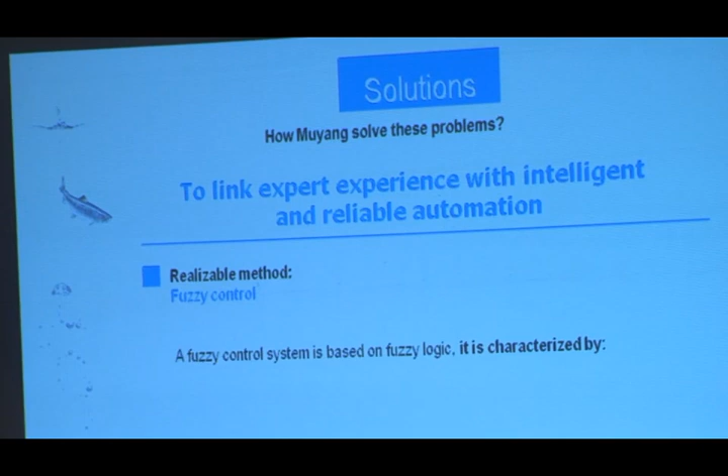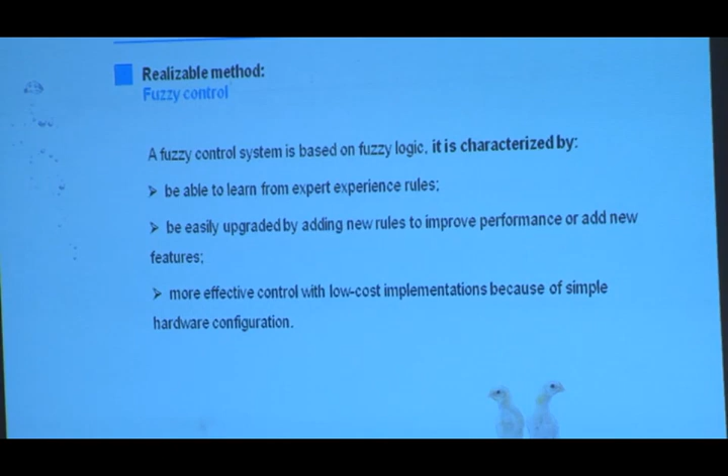So how Muyang solved this problem is by linking experience with intelligent and reliable automation. This method we're presenting today is fuzzy control. A fuzzy control system is based on fuzzy logic. It's characterized by its ability to learn from experience rules and be easily upgraded, adding new rules to improve performance or add new features. It's more effective to control, with low cost implementation because of the simple hardware configuration.

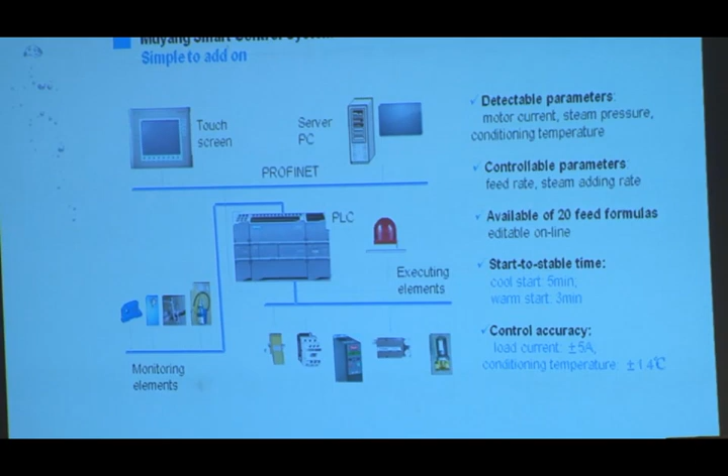The Muyang Smart Control System is simple, adding on a touch screen, power PLC, server PC, monitoring elements, and executing elements. Detectable parameters include motor current, steam pressure, conditioning temperature, and controllable parameters include feed rate and steam addition rate. It has a minimum of 20 feed formulas available, editable online, with a cold start-to-stable time of 5 minutes and warm start of 3 minutes, with control accuracy of load current at plus/minus 5 amperes and conditioning temperature at plus/minus 1.4 degrees.

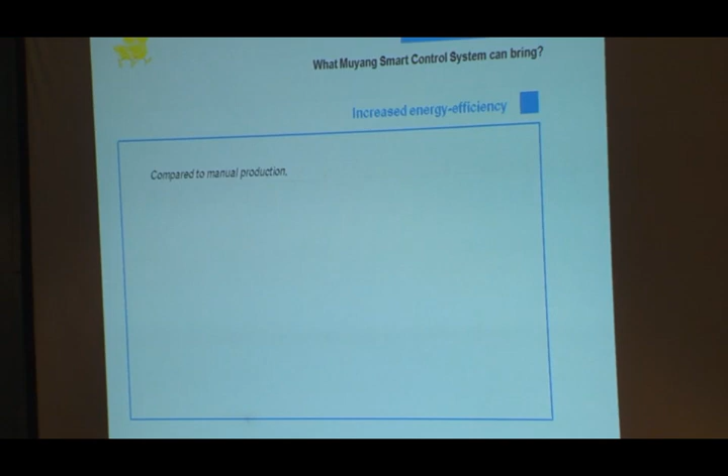What the Muyang Smart Control System brings is increased energy efficiency. After 2 years of running, we got actual real data showing that compared to manual production, output increased by 80%.

Thanks to the process parameter optimization function based on expert experience, the pelleting is able to run at a high operation level, and average power consumption decreased by 9%.

Because of stable and consistent production and eliminated downtime, there's more adaptable production change across different seasons. 20 formulas are available for production, and each formula provides customized expert operation solutions, with remote control, open interface, data processing, data collection, recording, reporting, printing, production tracing, and optimizing.

It's also able to communicate with an ERP system, if your company has one. Yeah.

Yeah, thank you. Just to give you some simple idea for this one. Yeah, thank you.

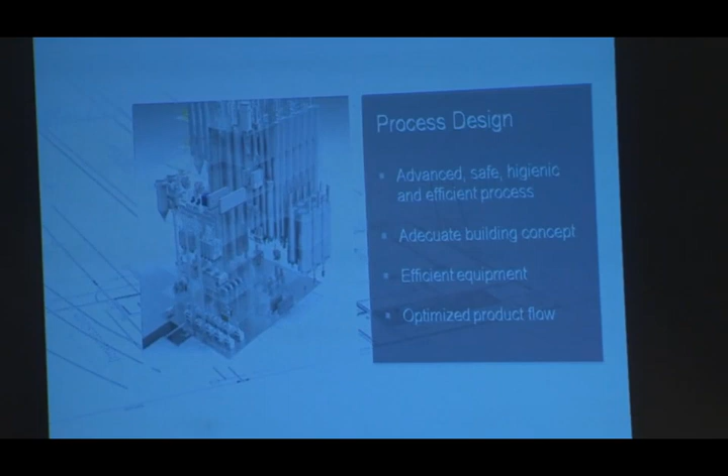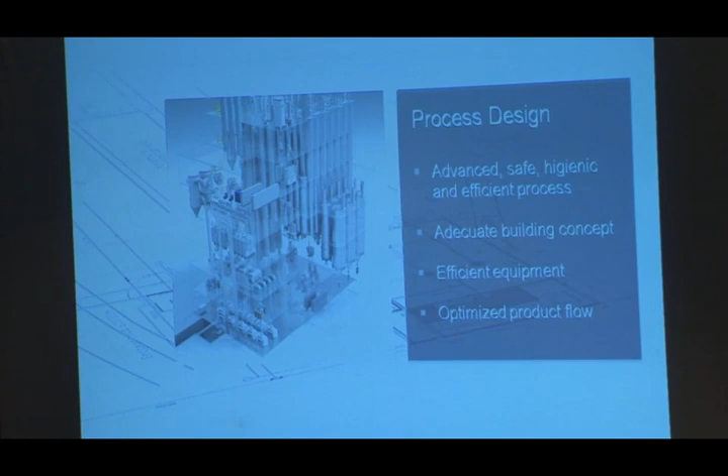Adequate building concepts, as you already heard this morning from my colleague Nick Wilkins talking about rice milling - that's also important in grain milling. Efficient equipment, as mentioned, optimize product flow to ensure the lowest possible energy consumption.

As a solution provider, we must respond to these trends, and we do this on the drivers we can directly influence. So let's make a bridge to our equipment now - these were the trends or the drivers.

Efficient cleaning - everything in a mill starts with efficient cleaning. Only the best possible prepared raw materials can be processed further, allowing the best possible end product quality.

Careful handling of the raw products, separating performance - just a few keywords. Reliable operation, low operation and maintenance costs. All this is of course linked with these trends or drivers we've heard before.

I'm going to show you now a few examples of equipment which have been designed exactly according to these needs or trends, to make sure your business runs successfully. For instance, our high capacity grain cleaner or grain classifier.

At the beginning of the value chain of the process, in silo transfer and cleaning, a classification machine - for that we use the grain classifier Vega, which guarantees accurate grading and cleaning, high throughput on minimum footprint, easy operation and maintenance, and low energy consumption.

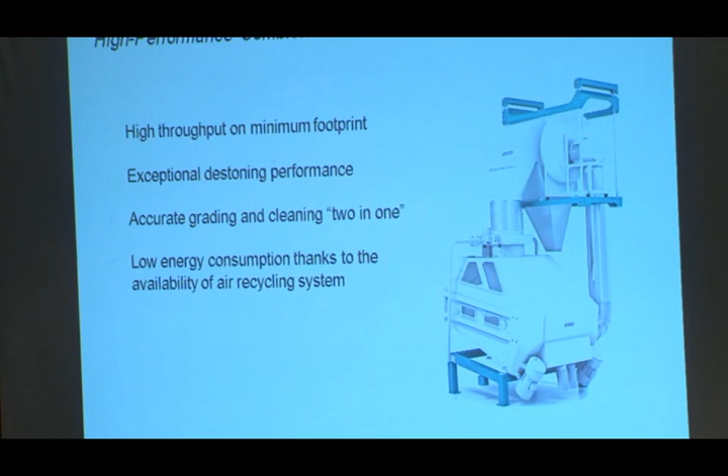So we are proud to announce and introduce our latest innovation, which you can see here - the MTCG combi stoner. A good example where our R&D department really looked after all these drivers and trends to make sure we covered all of them.

Optical sorting - this morning Nick Wilkins explained, for those who were here, how important optical sorting is nowadays in rice milling, in rice processing. It's the same situation in grain milling.

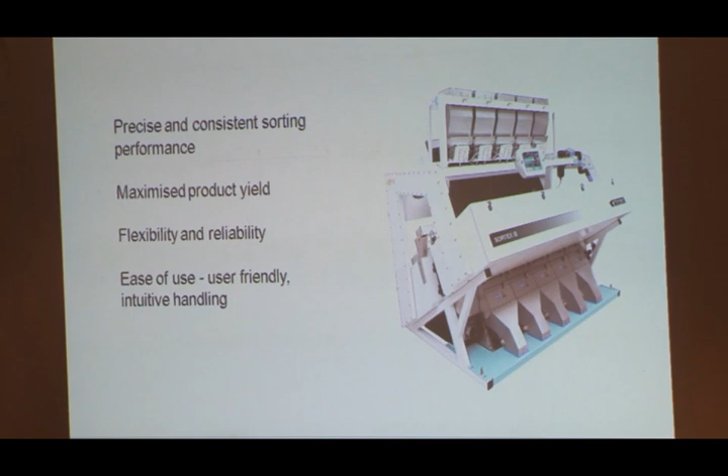You probably won't find a new mill today operated without any optical sorting machine. That means optical sorting has become a standard in grain milling, because of several factors: precise and consistent sorting performance, maximized product yield, flexibility and reliability, ease of use, user-friendly and intuitive handling - just a few keywords.

Whenever you ask for the highest possible product safety, optical sorters from Sortex are an absolute must-have piece of technology.

When it comes down to accurate water measuring and dosing, we recommend our PHD moisture control. Correct and constant moisture is one of the important factors that influence the whole milling performance.

Since wheat has natural moisture variations which impact the mill flow, it often requires continuous readjustment of the mill settings. And that should be done automatically, accurately, and constantly - meaning online and in real time.

Therefore, we have our PHD, which you can also see on our booth down there.

Let's go to efficient milling, or let's talk about efficient milling. What does it mean? What's behind it?

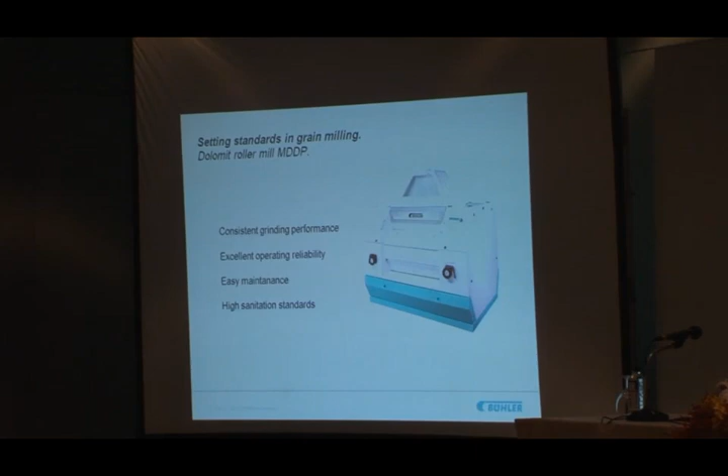In the heart of the mill, the answer is our Dolomit roller mill. It is a strong and market-proven machine with features resulting in consistent grinding performance, excellent operating reliability, easy maintenance, and high sanitation standards.

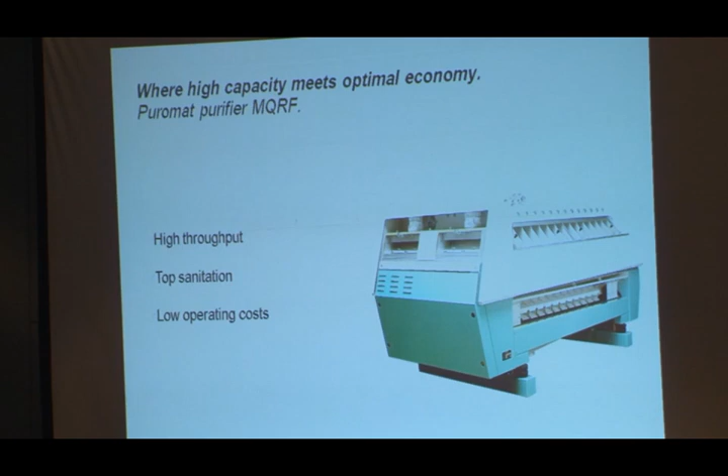For instance, our purifier - high throughput, top sanitation, low operation costs. You see, it comes again and again, no matter which machine we go to. It has a clear rule and we are following clear standards.

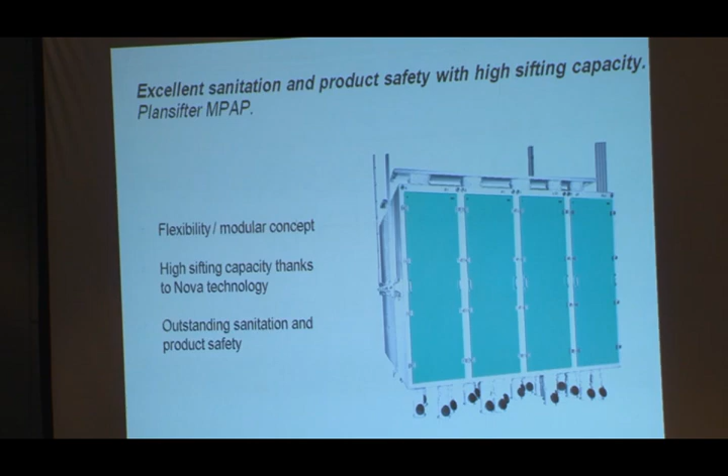Same situation with plansifters - flexibility, modular concepts, high sifting capacities, outstanding sanitation and product safety. It all comes back to these drivers again and again.

Premium end products. Let's go to the finished product section. This section is not less important than cleaning and milling. At the end of the day, top quality flour is the basis for top quality food, and your customers, bakers, ask for consistent quality at a fair price.

To guarantee such products and parameters, constant quality is needed in the finished product section: efficient on-target specifications and online checking like NIR systems, which allow constant online monitoring of your product quality.

Last but not least, the knowledge behind all of that is the most important point. Just building nice, good-looking machines is one side of the medal; the other part is the knowledge and technology behind it.

In the milling section, beside other factors, increased roll lengths and sifting area have a strong impact on milling performance, such as higher and more stable flour yields, more stable quality of finished products, more reliable operation, and less supervision needed in production than before.

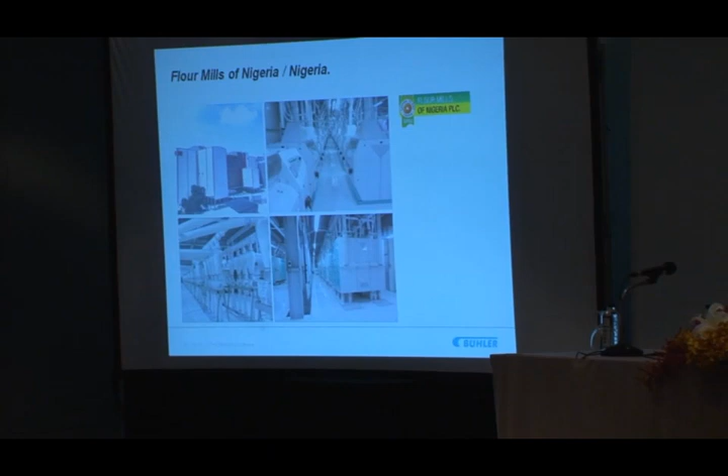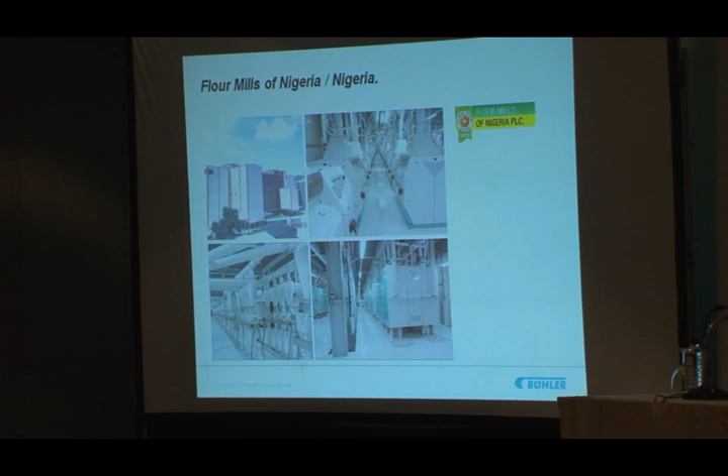Another nice example is Flour Mills of Nigeria. Here we just installed a new state-of-the-art flour mill complex added to an already existing 6,200 tons grinding capacity a day. That project consists of a 1,000 ton flour mill, a 750 ton system, and an additional 480 ton system.

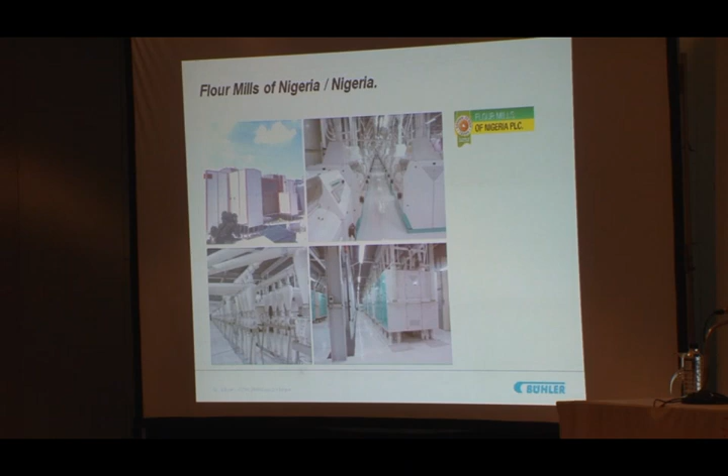In the meantime, since we commissioned that plant, this customer already installed another 550 ton mill and an 80 ton special mill. As you can see, success means working together, focusing on the most important parameters to make sure you're going to get there.

As a conclusion or take-home message, I'd like to give you some bullet points: optimal use of raw materials, low operation costs, high yield of premium finished products, and easy to operate and maintain are probably the main factors. Thank you very much for your attention. If there are any questions, I'm more than pleased to answer them.

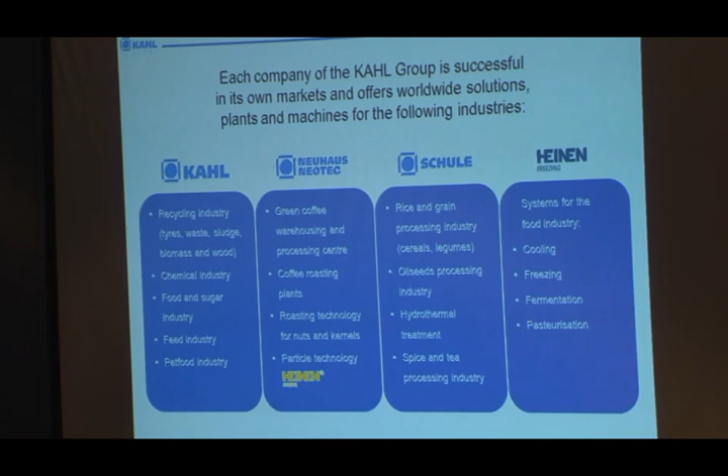This is an aerial view of our headquarters in northern Germany, in the city of Reinbek, close to Hamburg. In this area, the companies of Kahl and Schule are located, so the fabrication and also the engineering offices are located there. And then we have 2 more facilities near the city of Bremen, where companies Neuhaus Neotec and Heinen Freezing are located. In total, the Kahl Group today has about 700 employees.

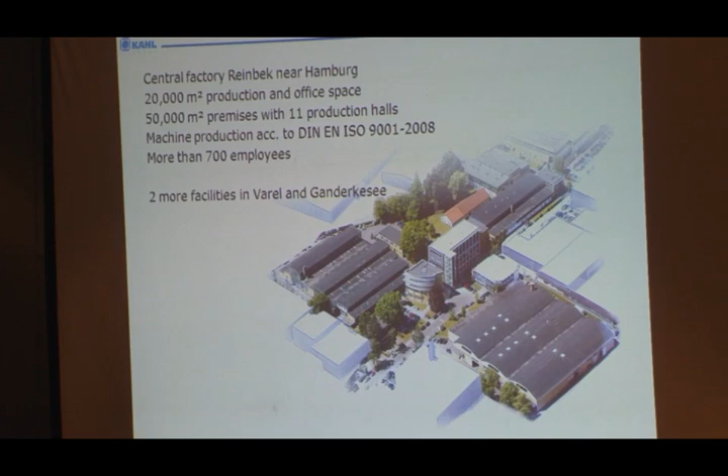As I said before, all 4 companies of the Kahl Group are medium-sized German businesses, so it's 100% made in Germany. The Kahl Group is really an exporting company. 85% of our products go to export. We have a number of offices also, for example, in Europe, in the Netherlands, in France, in Spain. We have an office in the United States. Recently we opened an office in Jordan, for example, for our Middle East activities. And then in other countries like Thailand, we work together with local agencies, quite often German trading companies who have specialized in exporting German-made products and technologies to countries like Thailand.

So after the general overview, I want to start with the first technology that I want to present to you today, which is oat processing. This is a technology that is provided by our sister company Schule. Schule can supply complete plants for oat flaking. Oat flakes are quite commonly used in breakfast cereals, mueslis, and muesli bars. Schule can supply the whole process from the oat grain to the finished oat flake.

In general, the process consists of a number of steps. As in most process steps, cleaning and classifying are the first steps. Then you need to shell the oat. The oats need to be sorted, they need to be cut. Then the actual flaking follows, and finally the drying process. I will look into these independent or separate process steps in a bit more detail in the next couple of slides. So for the cleaning, classifying, shelling and sorting equipment, there are a number of machines available from Schule. They have basically all the equipment to provide these process steps.

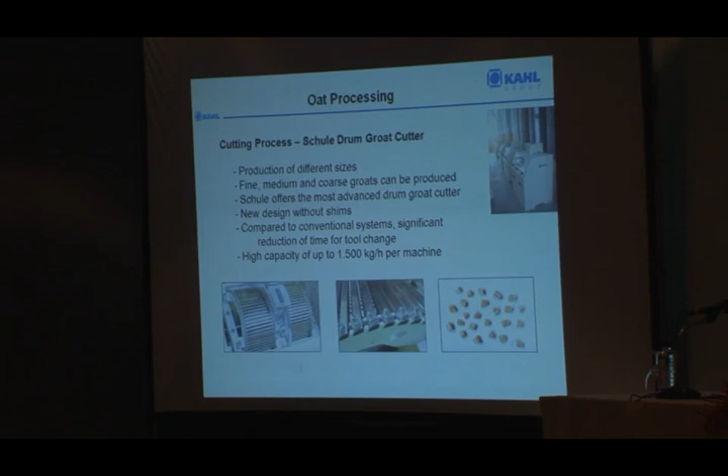One of the main process steps in the oat flaking process is the cutting of the grain, and this is done with so-called drum groat cutters. These machines are one of the specialty machines supplied by Schule, and with this machine you can produce groats of different sizes depending on your requirements. You can basically produce 3 different sizes: fine, medium or coarse groats.

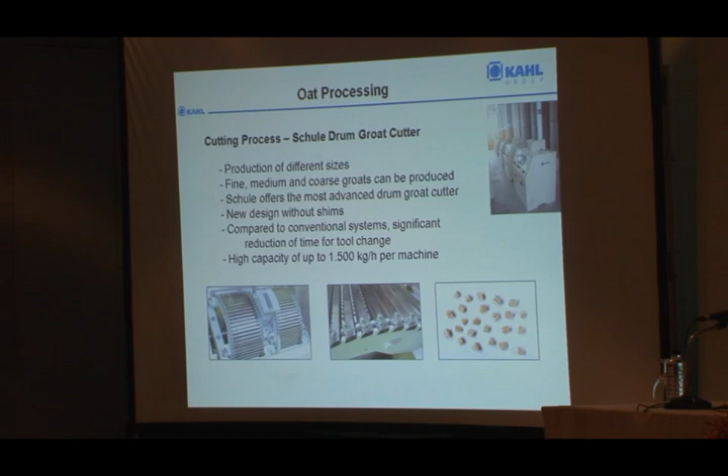Schule has put a lot of effort and money into upgrading this technology in recent years, so today Schule provides one of the most sophisticated drum cutters. One of the big advantages of the Schule system is that the tool change is much faster than with conventional systems. Here on the picture on the left is the knife assembly that cuts the groats into pieces, and these knives, as you can see in the middle picture, are attached to a basket.

With a conventional system, if you need to change the knives after they've become dull, each knife has to be taken off individually. With the Schule system, you can take out the whole basket, have a separate spare basket on site, put that in, and be back in operation in no time, then change the knives in the meantime, so there's no loss of production.

You can produce different sizes of groats, and this is achieved by the angle at which the knives are set. In previous designs, under each knife there was a small shim which could influence the angle of the knives. With the new system, you don't have any shims anymore, so the changeover time for changing the tools is reduced quite significantly.

The drum groat cutters come at a capacity of up to 1.5 tons per machine, and in case bigger capacities are required, 2 or more machines are used.

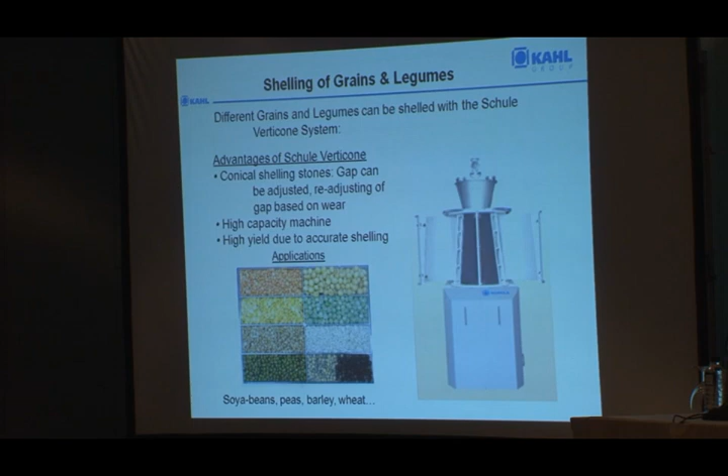The advantage of the Schule system is that we have conical stones, so when the stones are worn out, you can readjust the gap - you can lift the stones so you can maintain the gap between the stones and the screen.

In general, you see a number of applications here. For example, it can be used for soybean, for peas, for barley and wheat. Last year we supplied one of these machines to Thailand for one of the big companies for the shelling of soybean, and this customer will now use the shelled soybean as an ingredient for his dog food production.

Another aspect to consider when shelling legumes or peas is that in recent years, the price for fish meal used in fish feed production has increased. So people are searching for ways to replace this animal protein with vegetable protein. The issue with using vegetables like peas and legumes is that you always have a lot of fiber in the husk, so your percentage of protein is reduced because of the high fiber content.

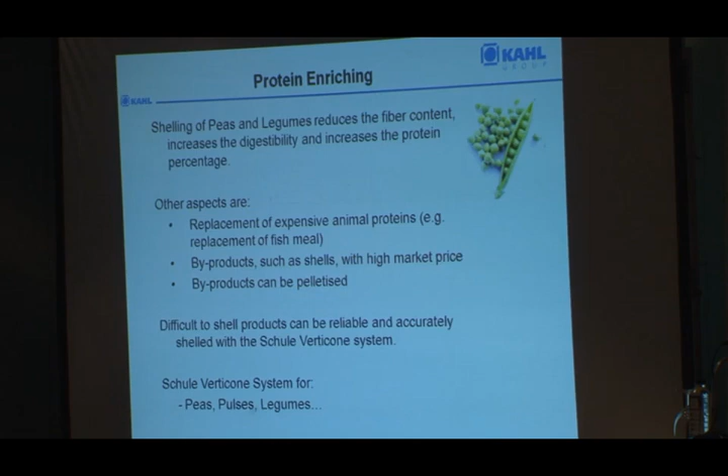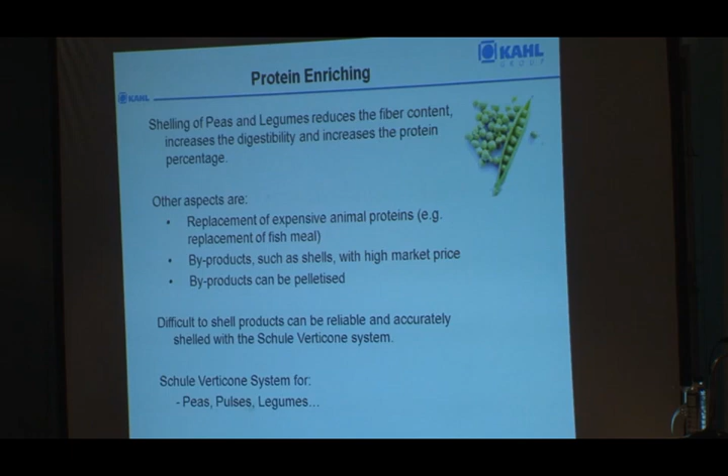Once you remove the husk properly, your protein percentage in the remaining product increases. So there's a chance of utilizing more vegetable protein in recipes for fish feed in the future with this system. As mentioned before, this system is used mainly for peas, pulses and legumes, but it can also be used for the milling of rice, which is another application.

Another technology offered by company Schule is the parboiling of rice. Schule can supply batch systems but also continuous systems for the parboiling of rice. It can be used for paddy and brown rice, and the parboiling gives you the opportunity to influence the properties of the rice.

For example, the dehusking properties are improved. You can increase the yield of the rice, and also achieve a higher nutritional value of the rice because some of the vitamins that are sitting in the husk or just below the husk move into the product.

So these are, in a nutshell, the advantages of the Schule process, and one of the main advantages is that they can offer the continuous process. It is a very flexible system - you can set the parameters as you go, and this technology is used by a number of Schule plants worldwide.

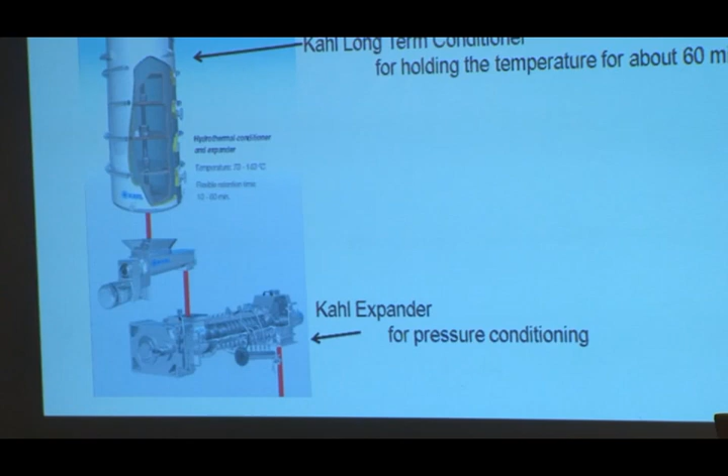It consists of a standard mixing conditioner where the rice bran is conditioned with steam. Afterwards, the rice bran is held at a temperature for 60 minutes and then passes through the Kahl expander technology. The reason for stabilizing the rice bran is that it has a lot of oil that gets rancid very quickly, so the shelf life of the rice bran is only very short.

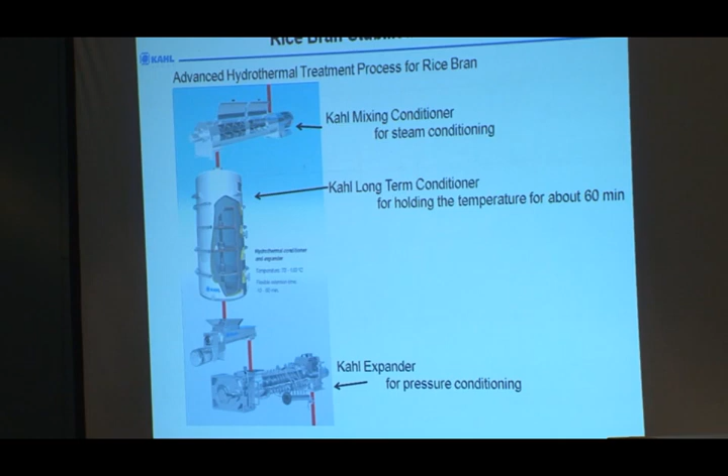If you put it through this hydrothermal treatment, the shelf life can be increased from a few days to several weeks. That gives the customer the advantage that he can buy the rice bran on the market when it's available for a cheaper price, stabilize it, store it, and use it for his extraction plant later on a continuous basis.

And that's basically it. Thank you. Thank you.

I think we had a wide-ranging presentation there with different types of equipment available for different processes in the grain sector. Anybody got a question?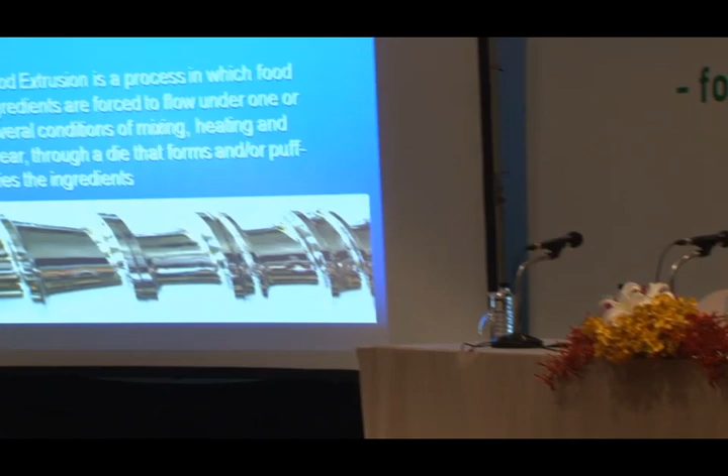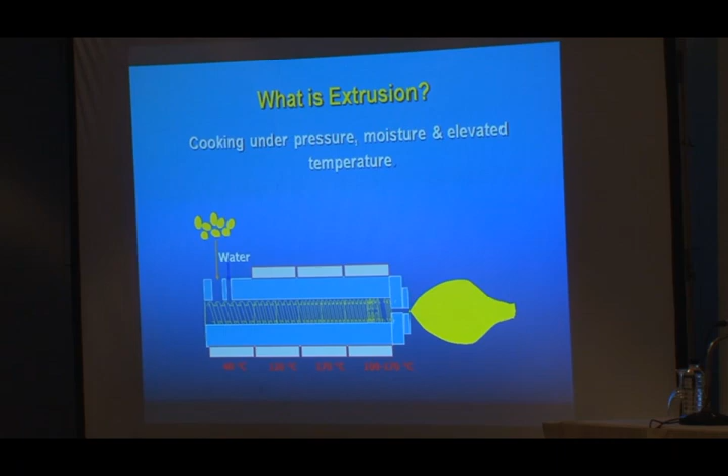It's basically a process in which food or feed ingredients are forced to flow under one or more conditions - mixing, heating, shear - to a die that forms a puff or different product like that. You can say it's a continuous pressure cooker in which we add our cereal, do the cooking, add some water, and it goes through and we cook it under pressure, moisture, and elevated temperature. I call it a continuous pressure cooker.

A typical extruder will consist of basically 4 different portions. One is a delivery system, then we have a preconditioning system, then of course the heart of the extruder, and at the end is the die. To make it easier, you can divide them into these 4 areas when explaining to students how that works.

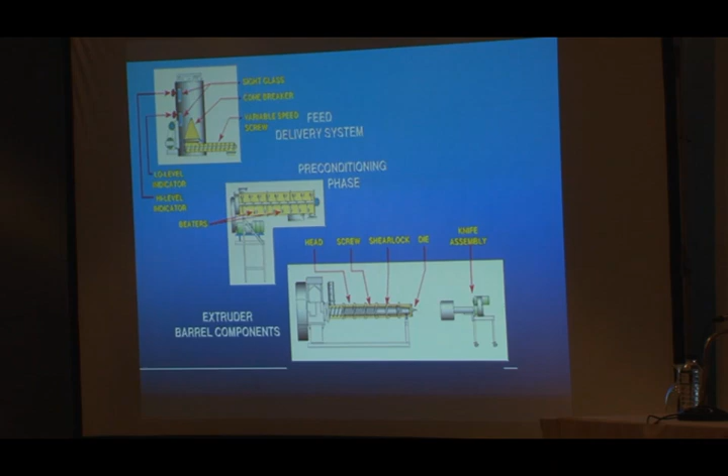Your cereals will go into the delivery system. Then we have preconditioning, in which we add some water and steam, and if we want to add molasses or fats or anything like that, we mix it together in that area. Then it comes to the barrel, where the cooking takes place, usually for 15 to 20 seconds, and then at the end there's some kind of knife or cutting device that cuts the product.

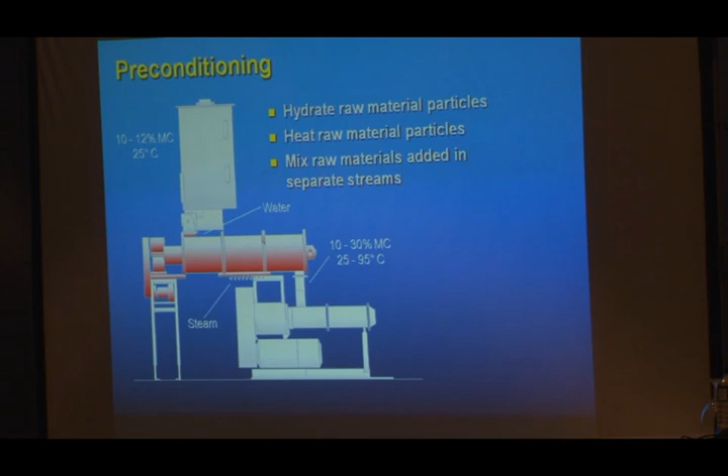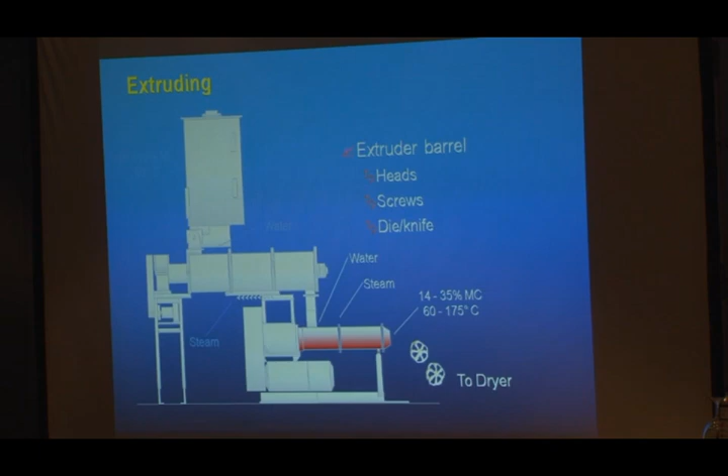To show you how it works hardware-wise: at room temperature we have our cereals, our grains, usually around 10 to 12% moisture content. From the delivery system it goes to the preconditioning, where we add steam and increase the temperature. Depending on our goal - like he just mentioned about rice bran - we can also put rice bran in at this stage, increase the temperature, and depending on what we want to make, increase the moisture content. Then it goes to the heart of the extruder, where we also have the option to add steam and water for final tuning, and then we cook it.

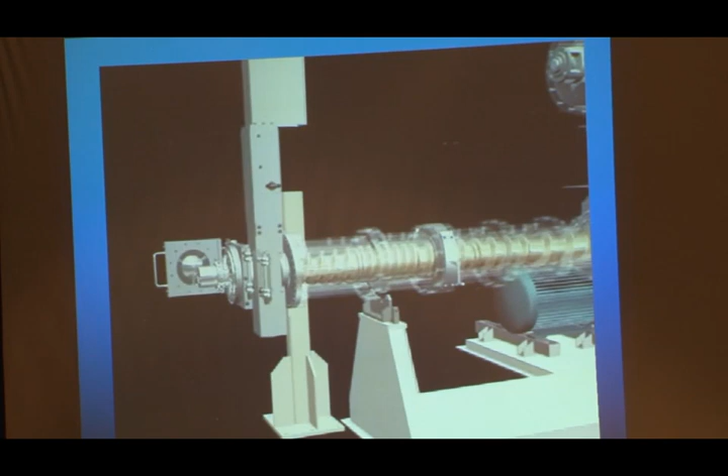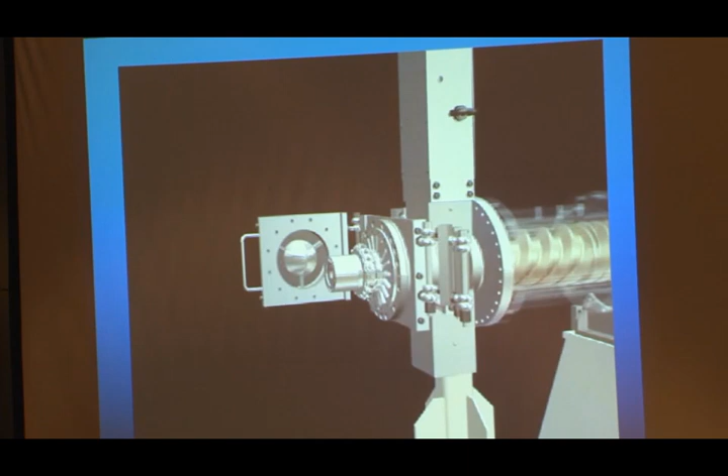To show you how that takes place, I have some animations here. Basically, as I mentioned, the raw material comes into the extruder's feeding system, where it's fed very thoroughly and accurately, and goes to the preconditioning section. There we have some kind of beaters - it could be a single shaft or a double shaft - which mix the raw material with steam, water, molasses, or anything you want to add. Then it comes to the heart of the extruder where cooking takes place, and at the end we have a die that shapes the cereal product. That's when the cooking takes place with this process, using some kind of extruder. That's a very typical process that takes place with any kind of cereal.

Just to give you some animations of what takes place inside the extruders. I wish I could go and see it, but usually it's not possible. So why are we talking about extrusion?

Because it offers a lot of advantages. Some of them we call adaptability. We can process breakfast cereals, snacks, rice bran, pet food, aquatic feeds, texturized soy protein, rice - we've got different things there, so it's very adaptable. A variety of products can be made in different shapes, textures, and colors - very hard shape, soft shape, semi-moist, all different can be done.

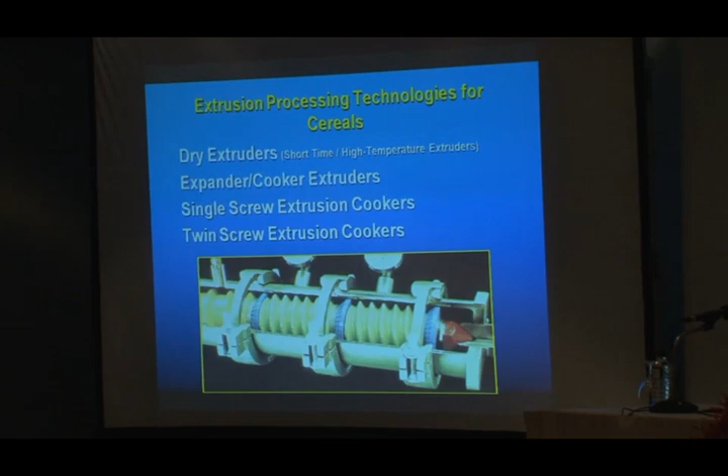There are different kinds of extruders that can be used in cereal processing. We have basically what we call dry extruders, which is very short time, high temperature. Then we have expanders and cookers and that type of extruders. We have single screw extruders and twin screw extruders.

By the way, in my pilot plant we have 8 extruders from different representatives. Showing some pictures doesn't mean I endorse anybody - we don't endorse anybody, but it's just what we have in our system.

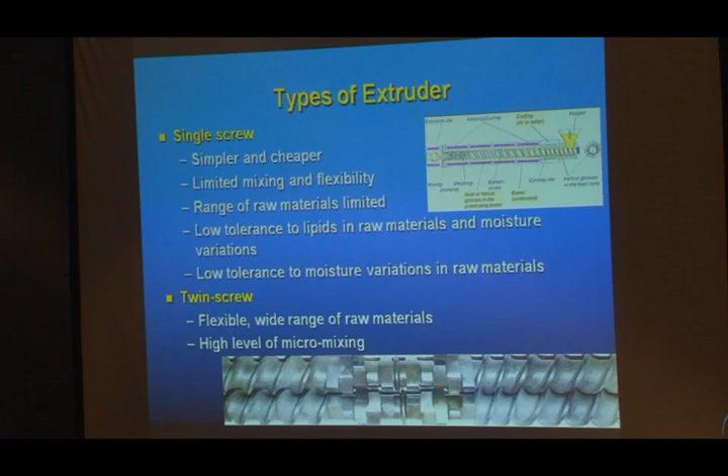Basically, single screw extruders are simple, relatively cheaper than twin screw, but they have limited mixing and flexibility. Also sometimes the range of raw materials may be limited - low tolerance to lipids, so if you have high fat products it may not go through, and also low tolerance to moisture variation. Whereas twin screw extruders are more flexible - they have a wide range of raw materials and a high level of micro mixing you can do. This is one of the very simple extruders that we also have.

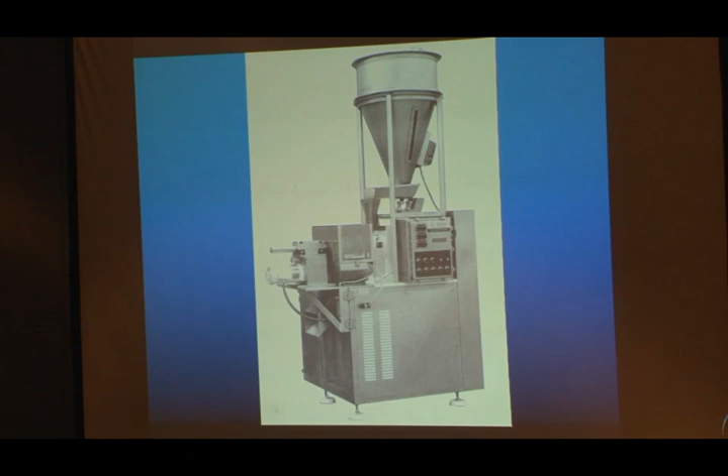This is for snack food production where you put some cereals - we use corn, sorghum, rice, you can use any of these things, and it makes the product. Basically it's a very simple process where your corn or wheat ground comes in, and in a very short time, within like 10 to 15 seconds, you cook it, and then you get your product - that's how you make Cheetos and all different kinds of products.

You can have a single or twin screw, dry extruder or wet extruder - any of these extruders can be used to make all different kinds of baby foods, cereals, crispy cereals, flatbread, soy foods, dietetic bars. We can use it depending upon what you want to make.

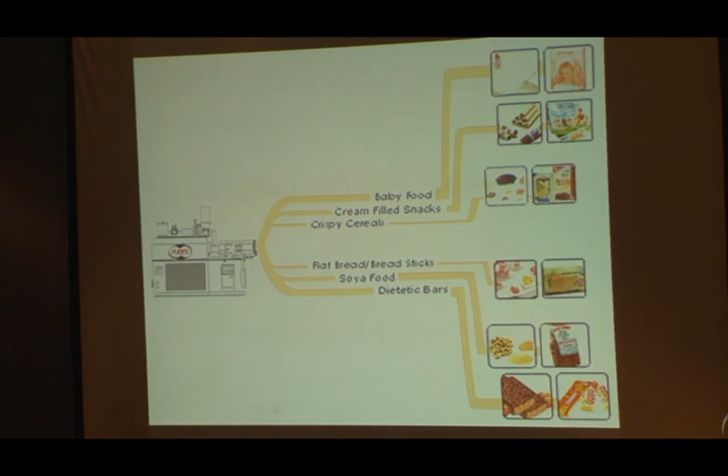Let's focus on cereals, because that's what my talk is about. Cereals are used as staple foods in the world basically - major sources of starch and energy. Most of our products are made from there. Some cereals contain a good amount of protein - corn, wheat, rice, barley, sorghum, and teff - all can be extruded very easily.

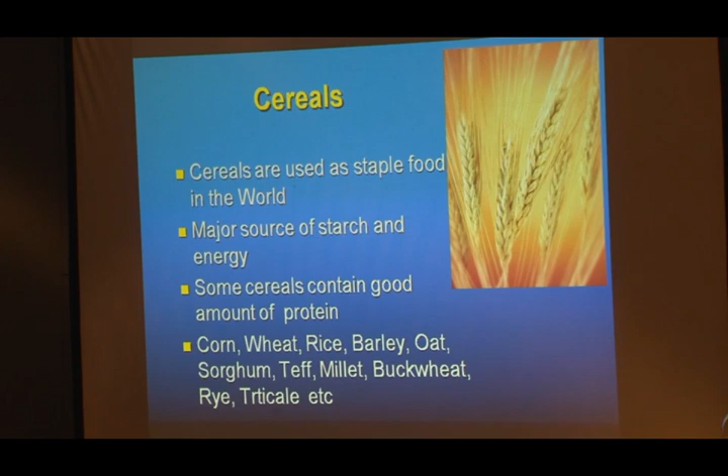Basically, we have some advantages when we extrude cereals. We can improve their digestibility. We can also increase the degree of starch gelatinization so we can digest better. We can inactivate some of the toxic compounds - if you have some kind of aflatoxin or other toxins, we can reduce the level. Of course we can also minimize contamination of microorganisms with these extruders. We can improve feed palatability, durability of storage life, and improve feed efficiency. So rather than using the whole cereal, if you process it, we can get a lot of different benefits as advantages.

Some of the cereals we work with are mostly sorghum, rice, and corn - all that we process. Corn is one of the cereals which is very common as a feed ingredient, and extrusion of corn increases digestibility. I mentioned that some kinds of aflatoxin, fumonisin, vomitoxin can be reduced in corn if we have it, and it expands very well to crisp pieces with typical corn flavors.

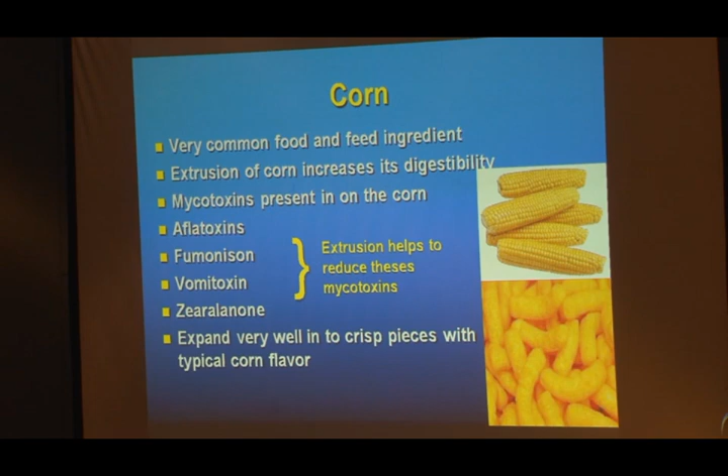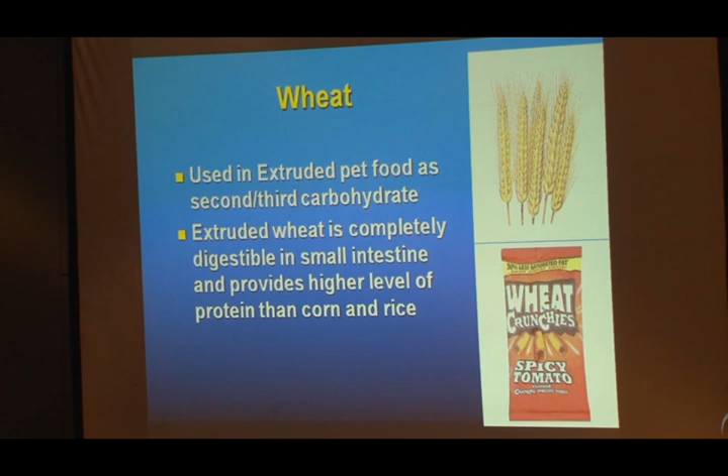Wheat is also extruded for different applications, pet food being one of the most common ingredients, and second or third for carbohydrates. We can also use it in cereals we eat every day at breakfast, which is higher in protein than corn and rice.

Oat and barley are also used. They are high in proteins and essential amino acids, and both are reputedly beneficial for health. Both contain beta-glucans, which aid in removal of cholesterol, and both are used for extrusion after dehulling.

Sorghum is very common in Texas, we grow a lot of sorghum there. Therefore we did a lot of work on sorghum, and I will focus a little more on it, since we've done some work on how.

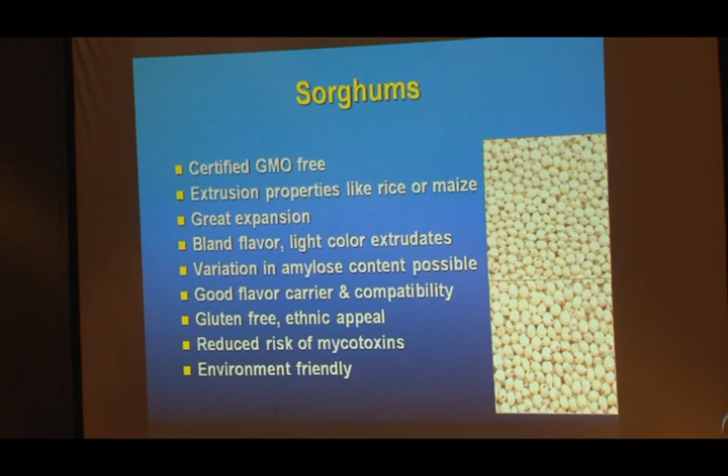Most sorghums are becoming very popular because you can still find it as GMO-free, extrusion properties just like rice and maize, and they extrude similarly with great expansion, bland flavors, light colored extrudates, and they're good flavor carriers, gluten free. Most of the new fashion in the US is everything has to be gluten free because of ethnic appeals and also allergies. People have allergies to that, and there's also reduced risk of mycotoxins, and it's environmentally friendly.

There are different kinds of sorghum we grow there: white sorghum, black sorghum, high tannin sorghum, and they are food grade sorghum and feed grade sorghum. By milling fractions you can remove some of the hulls from there in order to extrude them and make it suitable for food applications.

This is the raw grain, you'll see them, and if you decorticate them you can get a 90% yield looking like that. You can get 80% or more, removing more hulls, your production is going to go lower, but you can get it very nice. Once you remove the hulls through decortication, you can get flour.

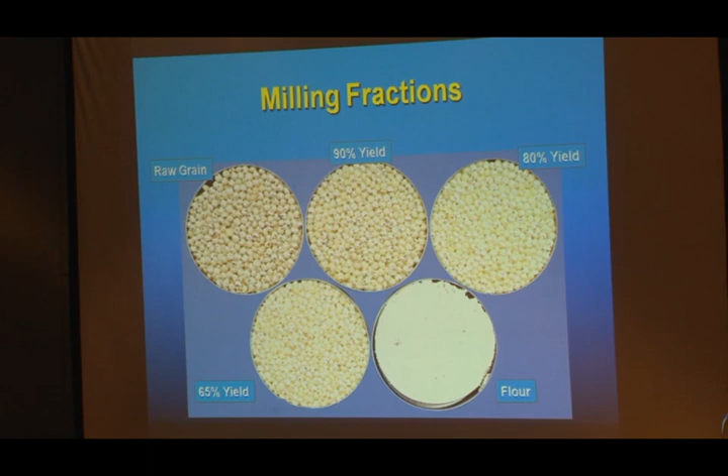Once you use decorticated grains in extruders, this white sorghum extrudate has similar properties to what we have with corn and rice cereal. Therefore, when you extrude them, they can easily replace corn, they can easily replace rice, and we can make a replacement because of some of the benefits we have there.

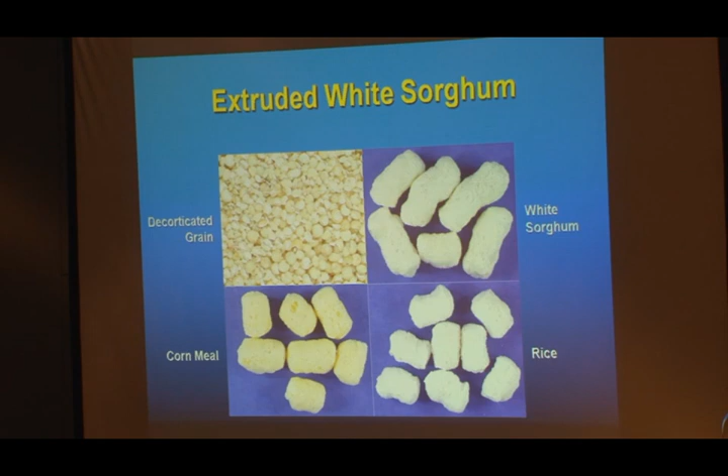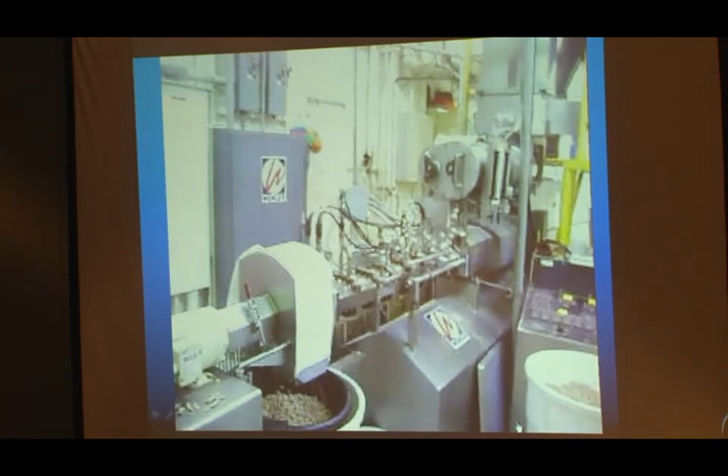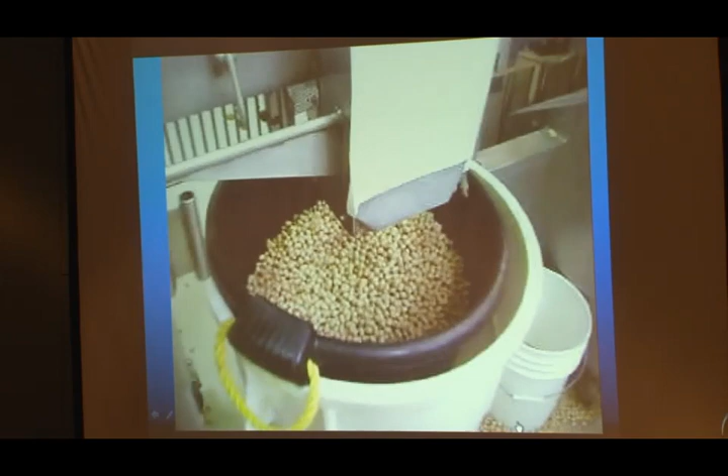We also made sorghum snacks. You can see the round balls and things like that from our twin screw extruders used for his PhD program, and you can see after that it's uncoated.

We used white sorghum, high tannin sorghum, and black sorghum to make breakfast cereal, and then after coating it, these are gluten-free. After coating, you can coat with sugars and flavors.

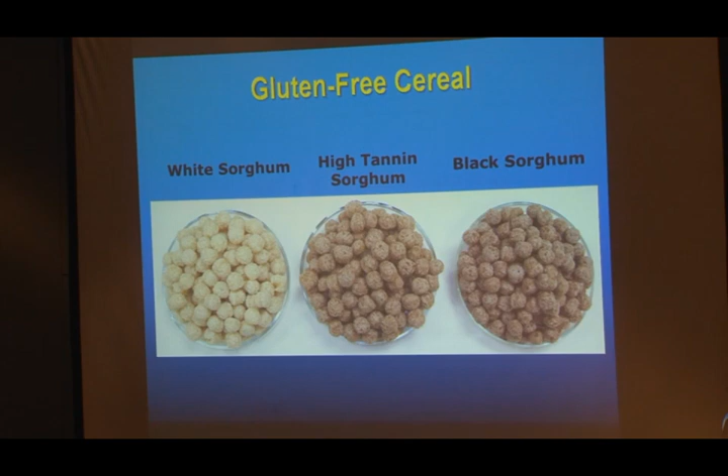Also, if you want to make snacks, you can just do a cheese coating on the sorghum, and we make a lot of snacks from sorghum as well. We also did sensory evaluation, and it was very popular, with many people saying this is a very good gluten-free snack with some real benefits.

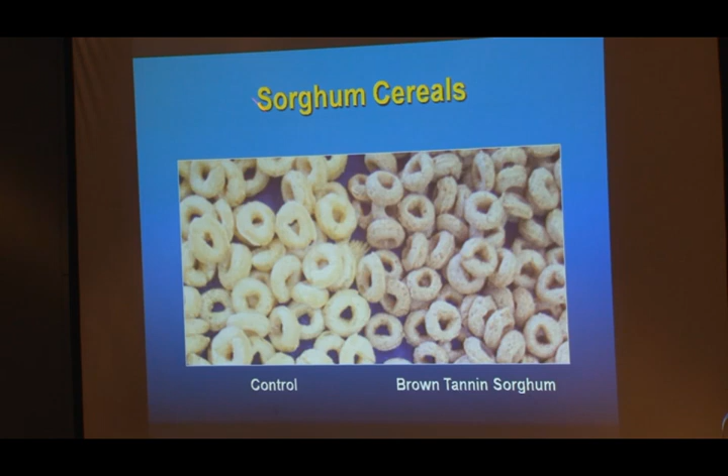These are some of the coated sugar cereals you can see. We also made Cheerio-like rings with that. You can see the control made by corn, and then of course we used 100% sorghum as well.

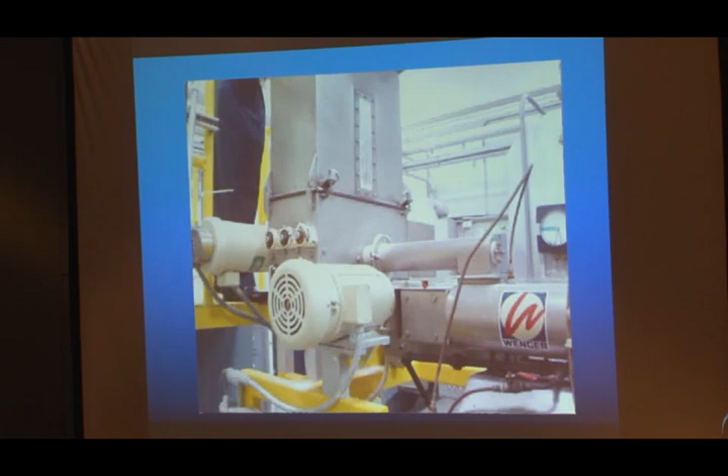This is our other extruder, the single screw extruder, and in this case we're making other snacks from corn. So it doesn't matter which cereal you have, you can prepare it, remove the hulls, and if it's high fat, somehow remove some of the fat, then process it - I believe this is how it's used for cereal.

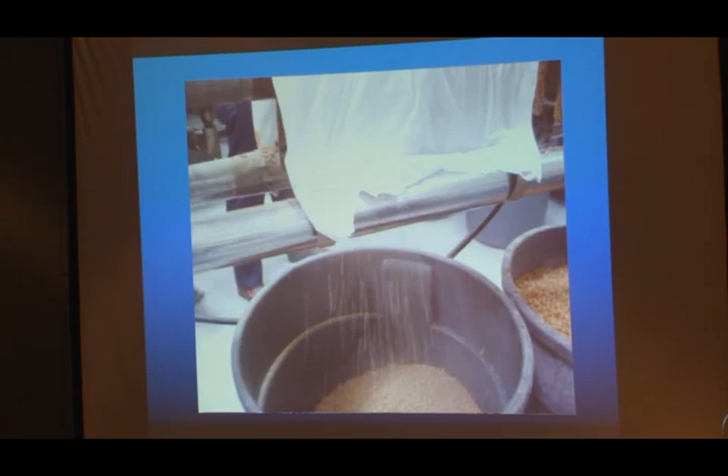Actually it's the high protein soy based ingredients, which is mostly soy flours, and this is what we are processing to go into the breakfast cereals and all that with the high protein, and you can process that as well in the extruder.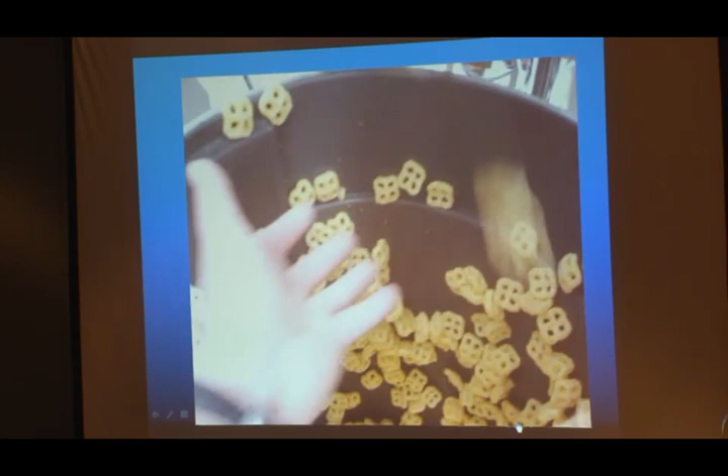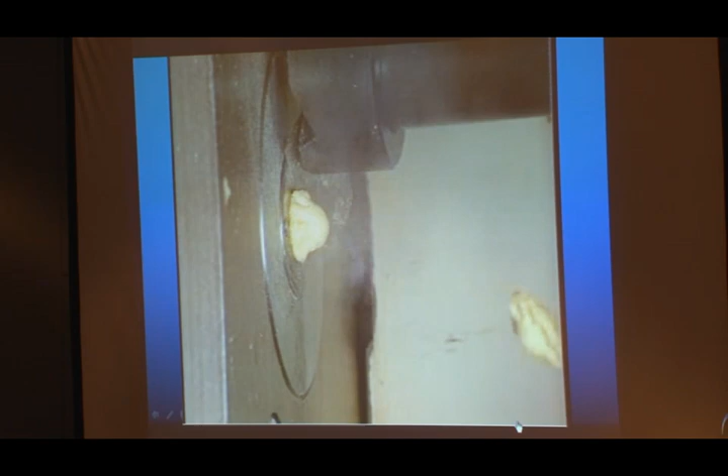It's all a function of the die. Let me show you the snacks process in the extruder in slow motion - when we process that, expansion takes place and it basically pops up from there.

Sorghum is also getting very popular in Africa, where we did some work, blending it with soy, using full-fat soybean. We use 80% sorghum and 20% whole soybean, mixed together, and it can be fortified. We did not decorticate the sorghum, we just use the whole sorghum, and we can fortify with vitamins and minerals - this is part of the diet, part of the cereal that you give.

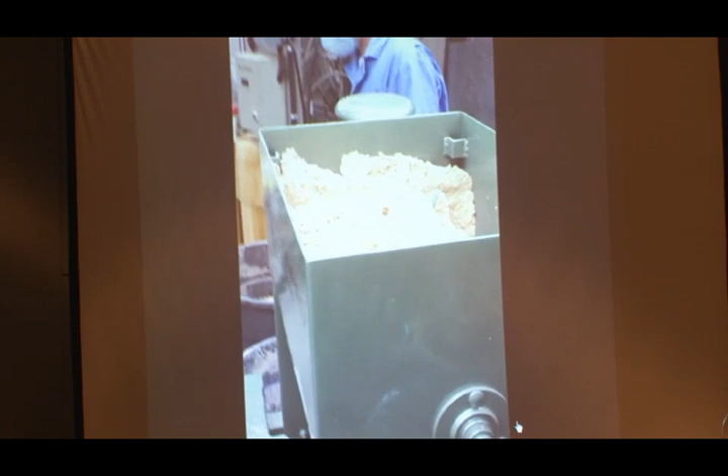When you extrude it, it looks like that coming out from there. You can dry it, grind it, and feed it to the people. This is our other extruder - in this case these are ground sorghum blended with full-fat soy, around 20% soy and 80% sorghum, extruded from there.

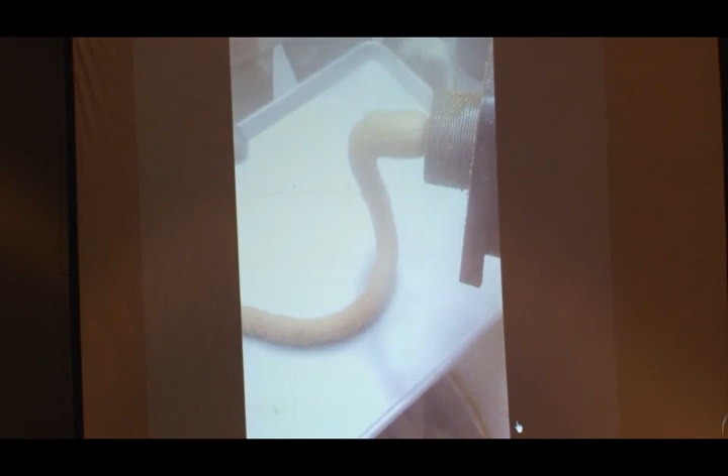We're just doing a demonstration here, puffing it, cooking it. Once it comes out you can cut it, grind it, dry it, and then put some sugar into it and feed that. We did quite a bit of work with sorghum, as it's getting very popular, and we can use any extruder to process most breakfast cereals with this technology.

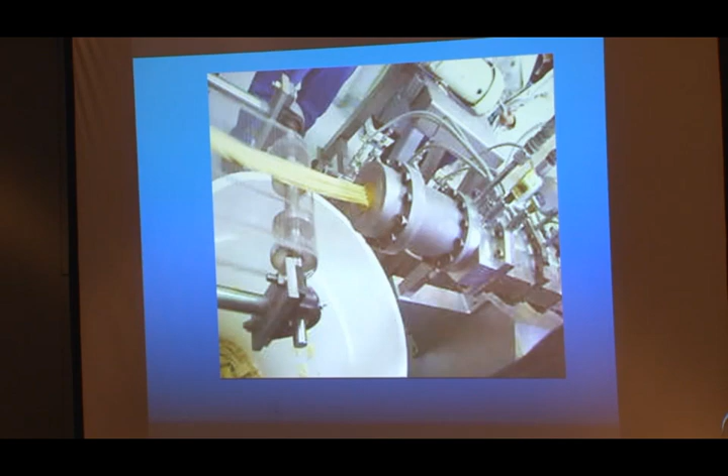This is the same extruder you can see - we're making high protein snacks. It's also a twin screw extruder, but we change the dies and different things on it. In this case we are making high protein multi-grain snacks.

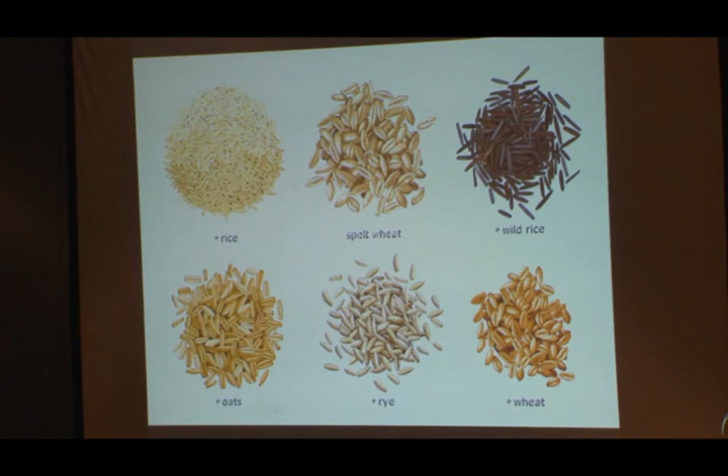Basically it doesn't matter what you have - rice, spelt wheat, wild rice, whatever. We have done a lot of work, and you can basically process any cereal using extrusion technology. Millet, barley - we did quite a bit of work with small, minor ingredients that aren't very common cereals. We process those as well.

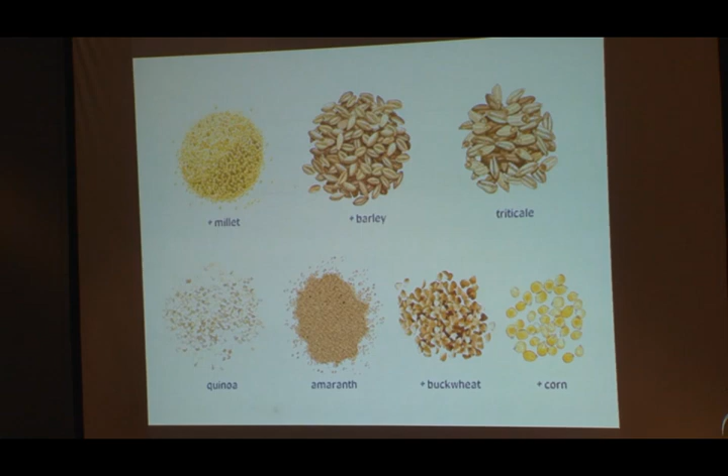We also did work with rice. We heard this morning from Bühler about rice - when you grind and process rice, you have a lot of leftover flour and broken rice, which isn't really used for anything except feed application.

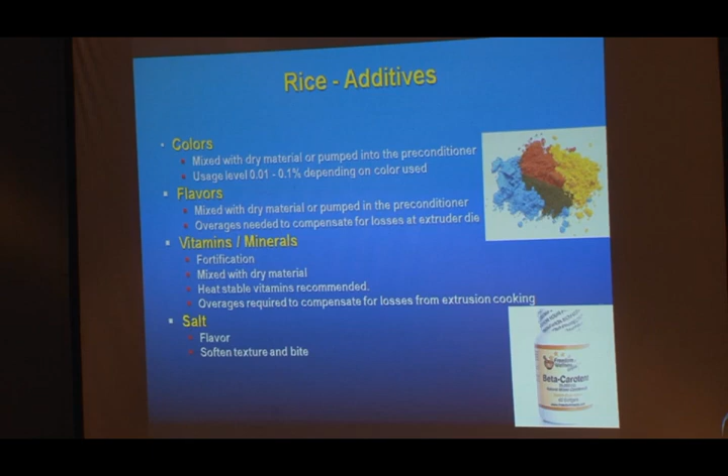We can take that material, grind it - all the broken rice and so on - and add some colors into it. We can add some flavors if we want. We can fortify with vitamins, minerals, add beta carotenes, mix different materials, add some salt and flavors, soften it up, and then use our die, which we developed for rice analogs, to make it very nice.

And then of course you have to dry them - drying is very important for that kind of extruded rice. This is basically what extrusion gives you the opportunity to do: use a low grade material that's going to go to animal feeding.

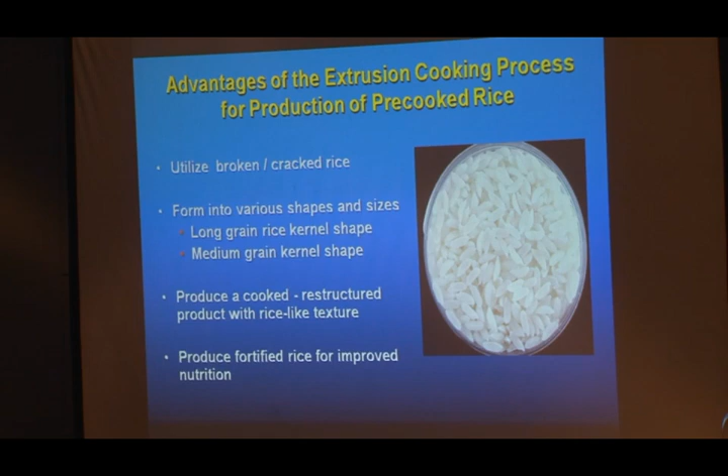We can take that raw material and add value to it. In this case you can make different shapes - a long grain rice, a medium grain rice. This produces cooked rice, reduces the cooking time, and you can fortify it depending on the feeding schemes in different parts of the world.

And here you can see different colors and pigments. You can have turmeric color added, like in India. We can have cinnamon color added, some flavor, cinnamon colors. And then we can also add beta carotenes, in different shapes.

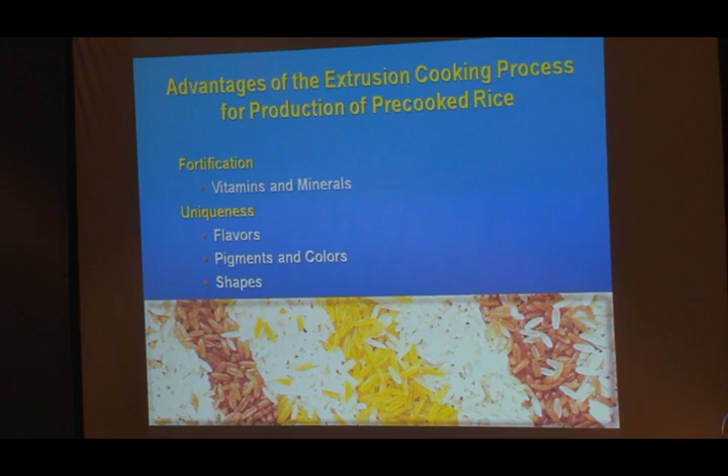We fortify them, and we can do that with extrusion technology. Extrusion technology is a flexible tool that can be used for different applications. If you have a raw material, we can process that. If you have byproduct, we can process that. We can do a lot of different things.

We can also do quite a bit of work with dal analogs, lentils. We took that same concept and combined expanded cereal technology with textured soy protein technology. Lentils are very popular in India and becoming a very expensive crop there, so there's a need to make natural dal analogs. In this case, we can use any source of protein: soy flours, bean flours, pea flours, and some dal lentil flour, just to add some touch and flavor to it.

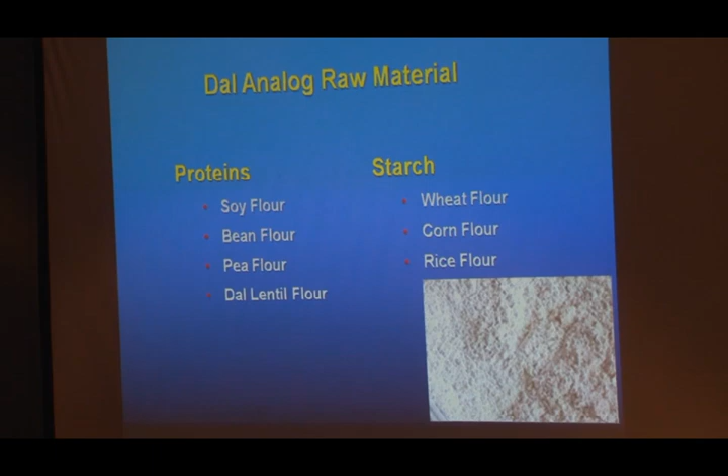We can use starches, wheat flour, corn flour, and all that. Of course, the color of the dal will be influenced by ingredient selection. Soy flours usually give you whiter colors versus darker ones. We can add some rice flour, and at the bottom you can see different replacements - we replace 50% rice, 50% soy, or 25% rice, 25% wheat, and 50% soy, and you can develop your own kind of cooked dal analogs.

In India, they are using this for school children feeding programs, where they use this every single day to make a soup that goes to lunch in the school programs. They use this dal all the time there, and it's high in protein because of the soy or other protein sources.

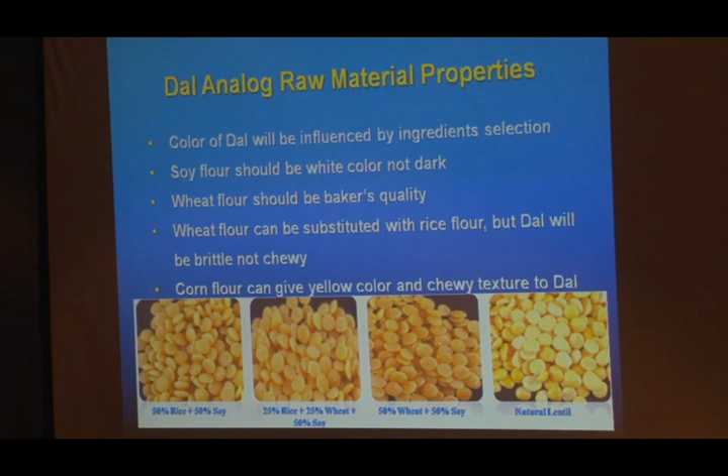This is some of the dies that you can make depending upon the shapes. You can design any kind of die. With any lentils, beans, all these things, we can do it.

After that, you can use either twin screw extruders with a vent so that you can cook it but not expand it. At the same time, you can use a twin screw with a single former where you cook it, and then you have a former which will shape it into a small dal that you can use. These are some examples showing a combination of different dals that we can make with extrusion technology.

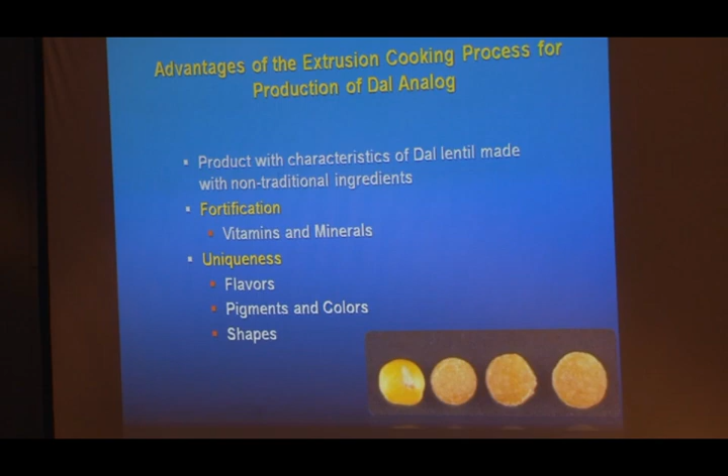This is 100% extruded pasta, 100% extruded rice, and 100% extruded dal analogs, all cooked together. During our demonstrations, we feed this to students when they come in - 100% everything extruded, vegetable-based dal and all, the whole meal is extruded there.

With that, I will be happy to answer any questions you may have. Thank you.

Do we have any questions? Quite a comprehensive presentation there. Thanks, Mian.

I just wonder, when we talk about fortified snacks - is that becoming more popular, or is it a hard sell to fortify?

Well, in snacks - basically in the US it's called junk food - the snack food industry is working very hard to get into the school menu program for kids. In order to be in the kids' school menu, it cannot be junk food; it has to be fortified, it has to have some protein source so they can say this is not junk food anymore, because they've already banned sodas and everything in schools. So snacks are getting very popular, and the new generation, people working on computers and all that, want to eat a healthy snack - they don't want to eat junk anymore. Even Frito-Lay came up with different snacks made with lentils and healthy, unique ingredients.